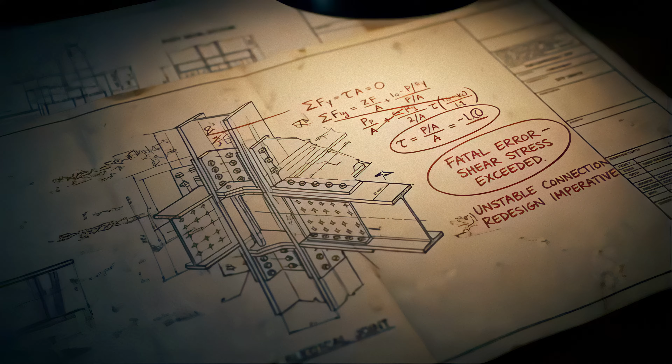The building was the Citicorp Center, fourth tallest tower in New York City. It had been open for barely a year. Tens of thousands of people worked inside it every day. Bankers, lawyers, maintenance crews, and pedestrians crossed beneath its raised base on their way to the subway.

Hidden inside that steel skeleton, threaded through every floor like a silent fracture, was a flaw so dangerous that a single autumn storm, the kind that hits New York once every 16 years, would have snapped the structure apart like a hinge. And the failure wouldn't be gradual. It wouldn't creak. It wouldn't groan. It wouldn't give anyone time to run.

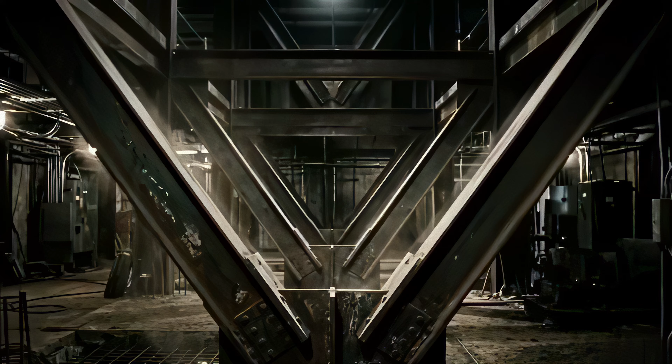The steel joints holding the building's skeleton together would shear simultaneously, and 25,000 tons of steel and glass would topple sideways across 6 city blocks of Midtown Manhattan. But here's what makes this different from any engineering disaster you've heard. The man who found the flaw was the man who designed the building.

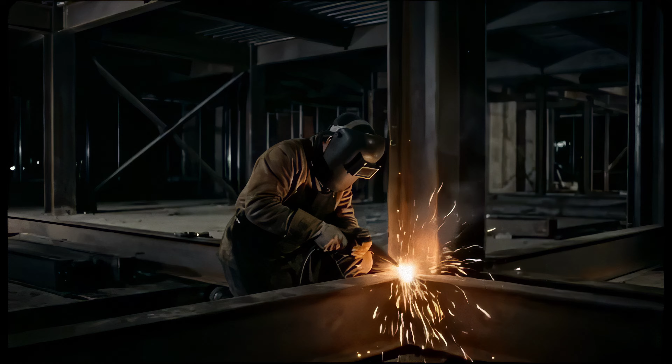He didn't go public. He didn't evacuate the city. He launched a covert operation to rebuild the skeleton of an occupied skyscraper at night, in silence, while a hurricane tracked directly toward New York Harbor. This is the story of how a budget shortcut, a student's thesis question, and a 400-ton block of concrete became the only thing standing between Manhattan and the worst structural disaster in America.

The problem started not with an error, but with a deal. In the early 1970s, Citicorp, one of the largest banks in the world, wanted to build its new headquarters on a full city block in Midtown Manhattan at Lexington Avenue and 53rd Street. But there was a problem. The northwest corner of that block already belonged to St. Peter's Lutheran Church, and the congregation wasn't selling.

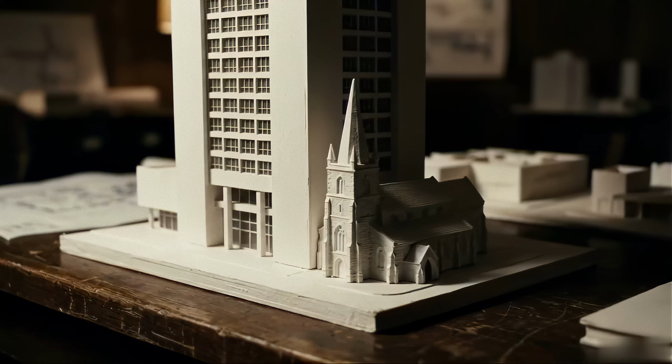So Citicorp proposed a compromise. They would demolish the old church and build a brand new, modern St. Peter's directly underneath the skyscraper, free of charge. The church gets a stunning new sanctuary. Citicorp gets their tower. But there was one non-negotiable condition. The church had to be freestanding. It could not touch the skyscraper. The sacred space had to remain structurally independent from the corporate tower above it.

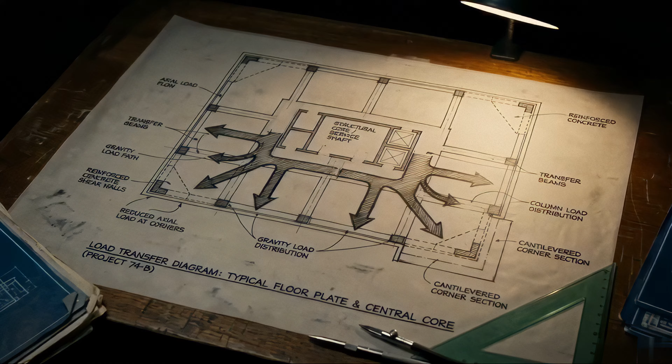Now, think about what that means. The building couldn't rest on corner columns. The entire weight of a 59-story, 25,000-ton steel tower had to bypass the corner of the lot entirely. The architect, Hugh Stubbins, turned to structural engineer William LeMessurier, one of the most respected in the profession, and asked him to solve what was essentially an impossible geometry problem. Build a skyscraper that floats above its own foundation.

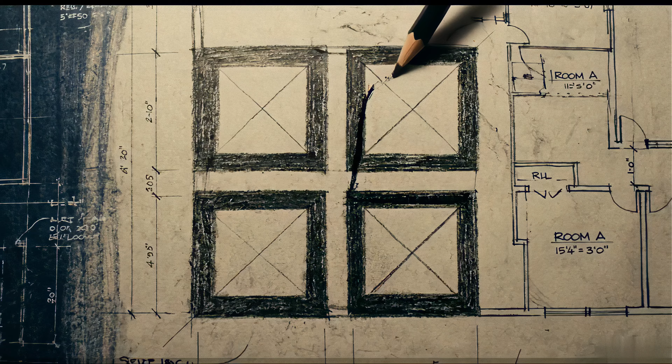LeMessurier's answer was radical. Instead of columns at the 4 corners, he placed 4 massive columns at the center of each side of the building, 72 feet in from the edges. The entire structure would rest on these 4 stilts, each rising 9 stories tall, with the corners cantilevered out over empty air. It was visually stunning, structurally unprecedented, and it created a problem that would nearly destroy everything.

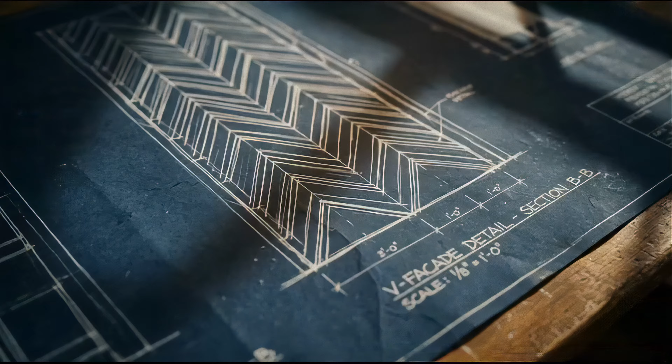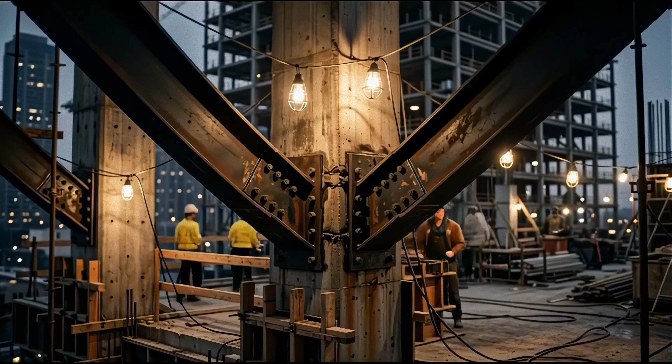A tower balanced on mid-face columns, instead of corners, was far more susceptible to lateral wind forces than any conventional skyscraper. LeMessurier needed a way to stiffen it without adding excessive weight. His solution was a series of massive inverted V-shaped steel chevrons, diagonal braces running in stacked zigzag patterns down the exterior, transferring wind loads through the diagonal members and into the 4 central columns. Elegant, efficient, and it worked beautifully on paper.

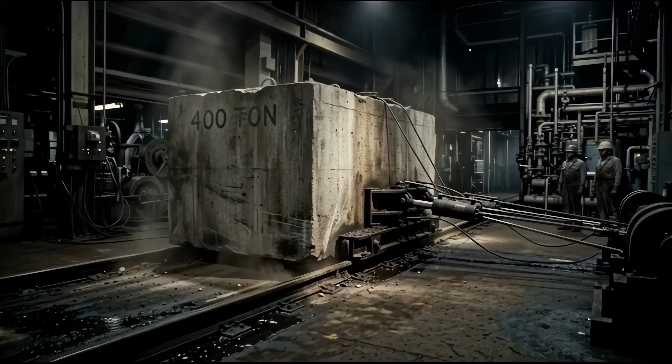To handle the increased sway, LeMessurier added one more innovation, a tuned mass damper. Near the top of the building, engineers installed a 400-ton concrete block, roughly the size of a small house, floating on a thin film of pressurized oil. When the wind pushed the building one way, hydraulic pistons drove the block the other way, counteracting the momentum. The first tuned mass damper ever installed in a skyscraper. It cut sway by nearly 50%.

The building opened in 1977 to rave reviews. It was celebrated as one of the most innovative structural designs in American architecture. LeMessurier became the subject of university lectures. Students across the country studied his chevron bracing as a textbook example of creative problem-solving. One of those students was about to ask a question that nobody in LeMessurier's firm had ever thought to ask.

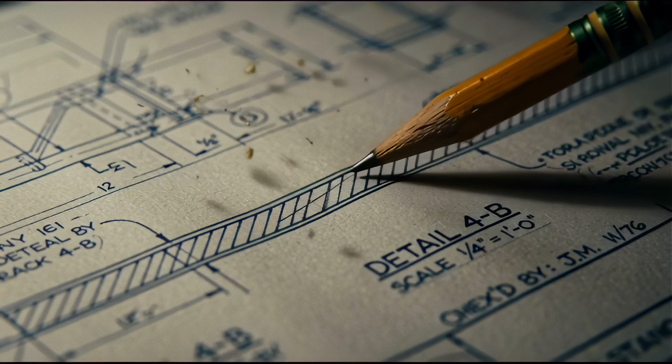In the spring of 1978, Diane Hartley, an undergraduate at Princeton, was working on her senior thesis, a study of the Citicorp Center that combined architecture, urban planning, and civil engineering. Her advisor was David Billington, one of the leading scholars of structural art. As Hartley analyzed the chevron bracing, she asked a deceptively simple question. What happens when the wind doesn't hit the building face on?

Now, here's the thing. In the real world, wind almost never strikes a building perfectly perpendicular. It swirls between adjacent towers. It comes from angles.

And the most dangerous scenario is something called a quartering wind, striking diagonally at roughly 45 degrees to the corner. Think of it this way. Push a bookshelf from the front, and it stays put. Push it from the corner, it tips immediately. That's what quartering wind does to a building with no corner columns.

And LeMessurier had never checked. In 3 years of design, review, and construction, nobody had ever run the numbers for diagonal wind. Hartley's question traveled from Princeton to LeMessurier's office. When he sat down to calculate the stress a quartering wind would place on the chevron braces, he found something that stopped him cold. Under diagonal wind, stress on the building's joints increased by 40%. That alone was alarming. But it wasn't the fatal discovery. The fatal discovery came next.

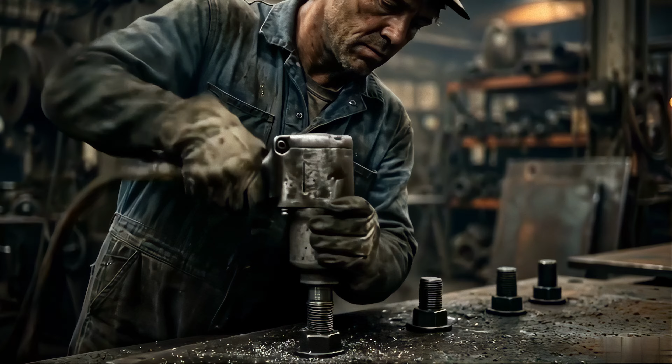During the original design, LeMessurier had specified welded joints, continuous connections that fuse steel members into a single, unbroken piece. But during construction, the contractor Bethlehem Steel had substituted bolted joints instead. Bolts are cheaper, faster to install, and in many applications, perfectly adequate. Not here. Bolted joints resist force through friction. Under static loads, they hold. But under dynamic loads, forces that oscillate and pulse with the wind, bolts slip. They loosen. And under extreme shear, they snap clean through.

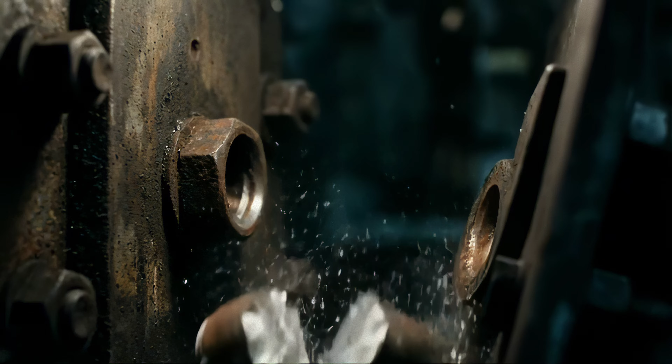LeMessurier's firm had approved the substitution. It had been reviewed, signed off. But no one had recalculated the dynamic wind tolerances under quartering loads with bolted connections. When he finally ran those numbers, the result was catastrophic. A 70-mile-per-hour quartering wind, a storm that hits New York once every 16 years, would shear the bolts instantaneously. The diagonal members would disconnect from the columns, and without the chevron bracing, the 25,000-ton tower would begin to lean, toppling sideways across Midtown like a felled tree.

LeMessurier now faced a decision that no engineer in history had ever had to make. The flaw was entirely traceable to his own project, his own approval chain, his own oversight. And the hurricane season was approaching. He could have stayed silent. Think about it. The probability was on his side. A 70-mph quartering wind might not hit for years, maybe decades. He could have gambled on weather and retired before anyone noticed. Every skyscraper you've ever walked into was approved by a system that, until 1978, didn't even account for wind hitting a corner. He could have hidden behind that code.

Instead, in June 1978, he picked up the phone. He called the head of Citicorp's real estate division. He explained the calculations, and he told them the building could collapse. Citicorp authorized emergency repairs under one condition: absolute secrecy. If the public learned that one of New York's tallest skyscrapers could fall over in a storm, the fallout would be devastating. Mass panic across Midtown, a stock crash, lawsuits, a crisis of confidence in every tall building in the country. So the repairs happened at night.

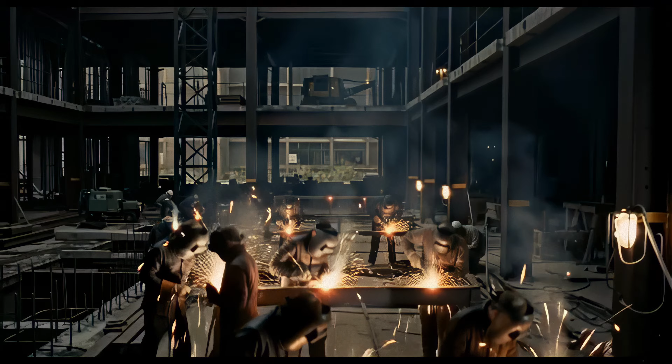And then, in early September 1978, the Weather Service issued a warning. Hurricane Ella was forming in the Atlantic, tracking northwest toward New York. The welders were halfway through. Ella was 3 days out. The repair crews worked faster. Welding shifts went from 8 hours a night to 12. Additional teams were brought in. The Red Cross finalized its evacuation protocols. Emergency shelters were designated across the Upper East Side and Midtown. For several days, the city of New York had a fully operational disaster plan for a building collapse, and the 8 million people living around it had no idea.

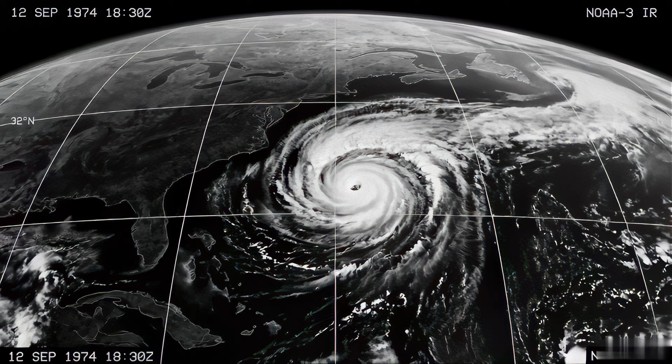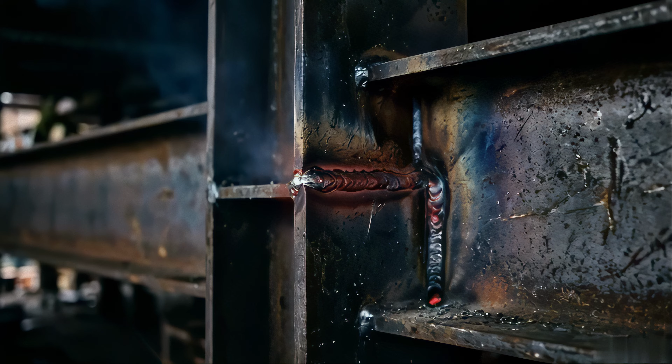And then Hurricane Ella turned. It veered east, out into the open Atlantic, and dissipated without making landfall. By October 1978, every single joint in the Citicorp Center had been reinforced. The building's structural integrity was restored, in fact, improved beyond its original design specifications. The tuned mass damper kept running. The tower stood as strong as LeMessurier had always intended it to be, and nobody outside a small circle of engineers, executives, and city officials knew it had ever been in danger. Here's the part that almost defies belief. The entire crisis, from discovery to resolution, played out during a New York City newspaper strike.

The Times, the Post, the Daily News, none of them were publishing. Investigative reporters weren't prowling construction sites. Nobody noticed the welding crews entering the building after dark, night after night, for 3 months. The story, by sheer coincidence, fell into a complete media vacuum. It stayed there for 17 years.

In 1995, journalist Joe Morgenstern published the full account in The New Yorker. The article, The 59-Story Crisis, became one of the most widely read pieces of engineering journalism in history. It revealed how close Manhattan had come to a catastrophe that would have dwarfed any natural disaster in American urban history. LeMessurier's reputation remarkably survived.

He had come forward voluntarily. He had risked his career, his firm, and his professional standing to fix a problem he could have quietly ignored. The engineering community recognized his actions as a model of professional ethics, a case study, not for the failure, but for the response. His willingness to self-report became a foundational lesson in engineering ethics courses around the world. But the deeper lesson isn't about one man's courage.

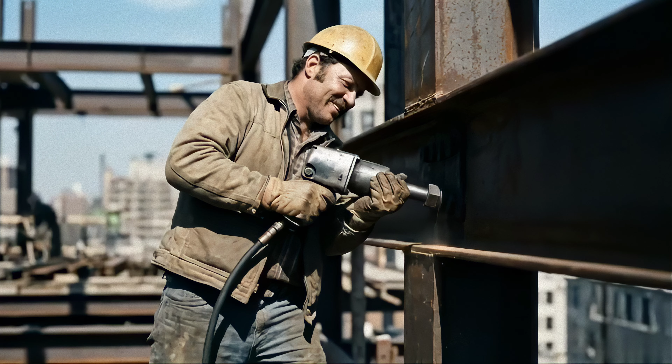The deeper lesson is about what happens when cost optimization enters the critical path of a structural system. The bolted joints weren't installed by mistake. They weren't negligence or sabotage. They were a deliberate budget decision. Bethlehem Steel substituted bolts for welds because bolts were cheaper, faster, and easier to install.

And under the loading conditions, the building code required engineers to check perpendicular wind only. The bolts were adequate. They passed every inspection. They met every standard. The problem was what the code didn't require. In 1977, the New York City Building Code did not mandate analysis of quartering winds. Engineers were only required to calculate wind loads hitting each face head-on.

The diagonal case, the one that actually governs the behavior of a building with mid-face columns, simply wasn't part of the regulatory checklist. And this is the pattern that shows up in every systemic failure this channel has ever explored. The code said check A, nobody checked B. The disaster lived in B. Value engineering. That's the industry term for making something cheaper during construction.

In this case, it nearly turned a skyscraper into a tombstone, not because the engineers were lazy, not because the contractor cut corners out of malice, but because the system assumed that if you checked the boxes, you'd covered the risks. It hadn't. The substitution was legal. The approval was documented. Every box was checked, and yet the building was 16 years of weather away from falling over. The system didn't fail because someone broke the rules. It failed because the rules didn't describe reality.

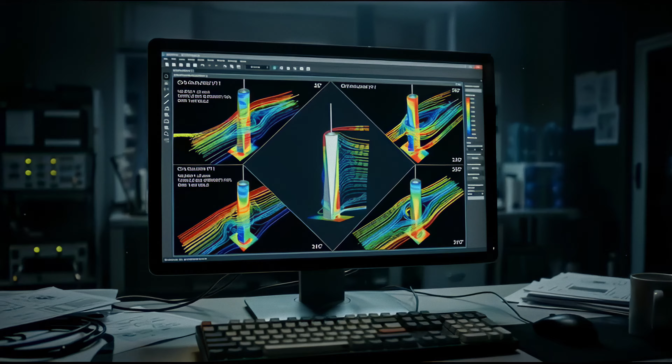Every modern skyscraper built since the Citicorp crisis includes quartering wind analysis as standard. The building codes were rewritten. The profession adopted new guidelines for reviewing contractor substitutions, and value engineering acquired a permanent asterisk. Any substitution must be re-verified against all loading conditions, not just the ones the original design checked for.

The Citicorp Center still stands today. It's been renamed 601 Lexington Avenue. The Chevron bracing is visible from the street, those dramatic diagonal lines running up the facade. Most people who walk past it every day have no idea that those steel members were, for 3 months in 1978, the weakest links in a chain that held a city's safety in the balance.

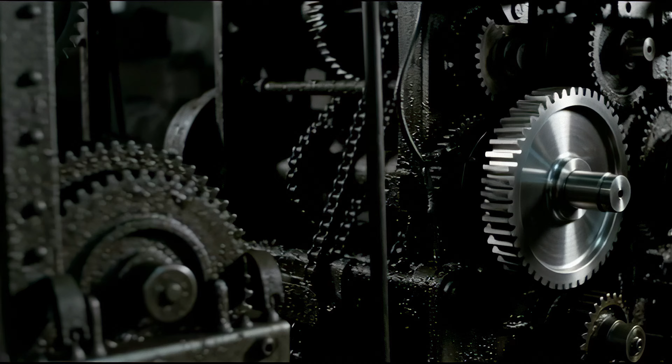There's something deeply unsettling about the Citicorp story, something that no amount of engineering analysis can fully resolve. The building code was followed. The contractor was qualified. The engineer was brilliant. The design was innovative. Every institution in the chain, the architecture firm, the structural consultants, the steel fabricator, the city inspectors, functioned exactly as it was supposed to, and the result was a 25,000-ton structure balanced on 4 stilts, held together by bolts that couldn't handle the wind.

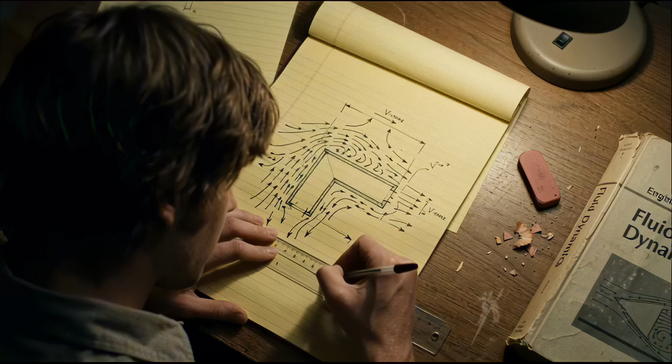The gap between what the system checked and what reality demanded was filled by a single student's curiosity, a thesis question, a what if. Diane Hartley didn't know she was saving lives. She wasn't trying to expose a scandal or challenge an industry. She was writing an undergraduate paper about an interesting building. She asked a question because she was trying to understand how the structure actually worked, not how the code said it should work, but how physics would treat it when the wind came from the wrong angle on the wrong night.

And that question traveled from a seminar room in Princeton to a phone call with the most respected structural engineer in the country. From there, it traveled to a boardroom in Manhattan, and from that boardroom, it traveled to a welding crew working 12-hour shifts through the night, racing a hurricane up the Atlantic coast. The margin between safety and catastrophe wasn't a wall of steel or a line of code. It was a question nobody in the profession had thought to ask until a student, unburdened by expertise, simply asked it.